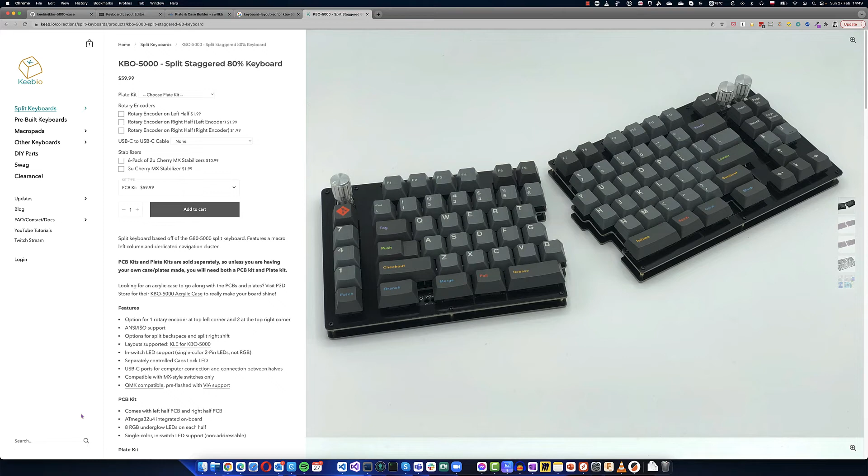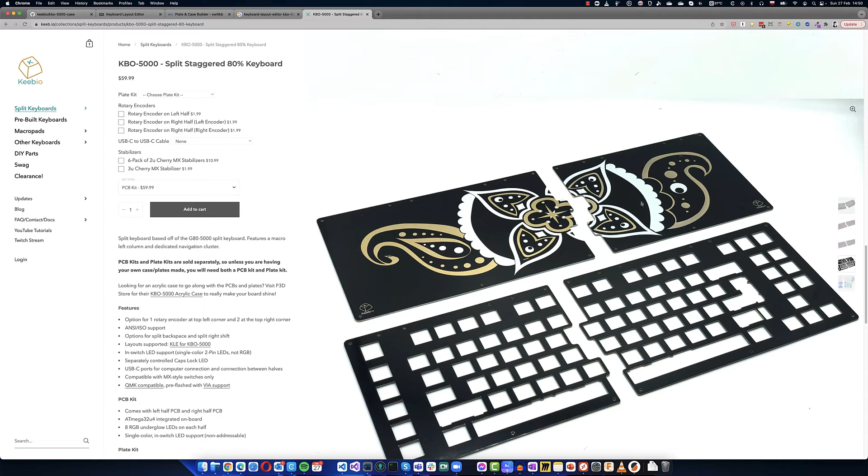Hi, it's me again, building my KBO 5000. So I have the board, I have plates and everything around it, the PCB that is Mill-Maxed and the plates and some additional stuff like switches. But for now I want to have the body, not only the plates but also the whole case that will be closed.

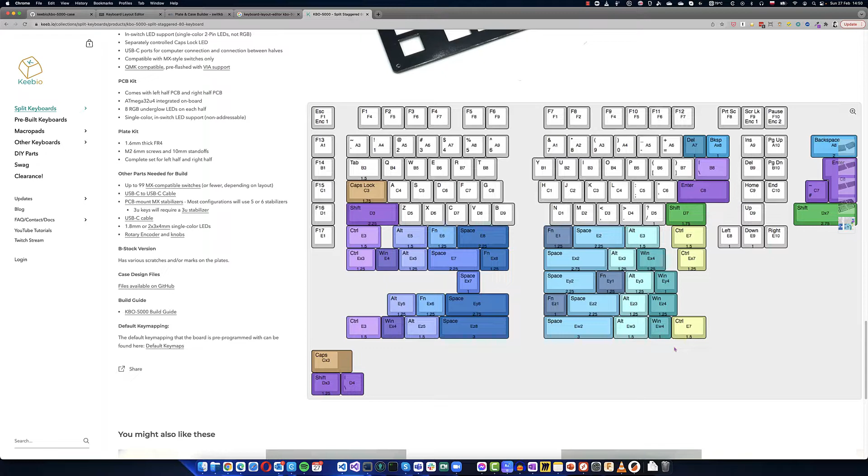What's the plan? This is a great place to start - the key map and every possible combination of the key. It was hard to find because here we only have the image.

Of course, I can build it from scratch in the tool, but it would be nice to have it out of the box. So first place to look is Keebio GitHub. Keebio has a lot of stuff there, and here are the cases, for example for KBO 5000 or firmware iris case. Also Quefrency, which I will also use.

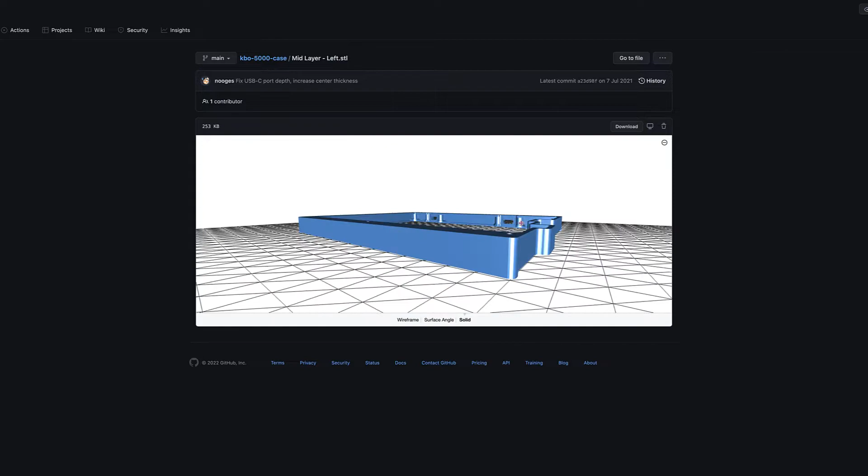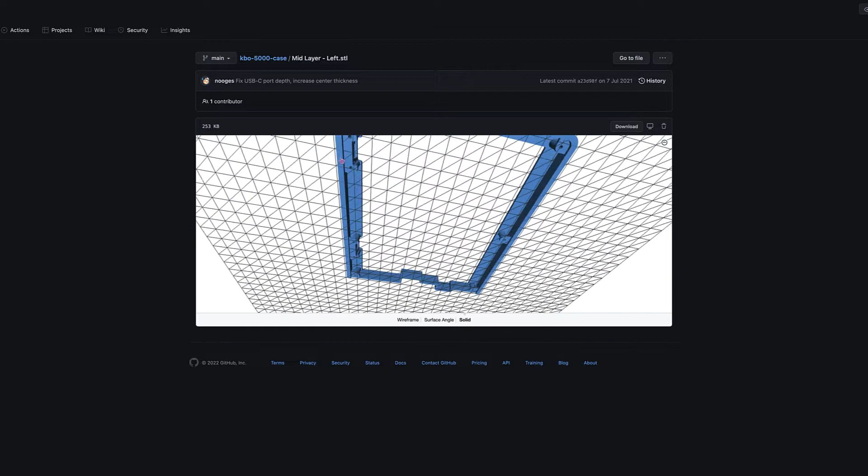But when we go to KBO 5000, there's only kind of middle case. It's nice that GitHub generates a preview of the file, and it's not bad, but at the front the case is a little bit wider than I would like, because I like when the underglow is nicely visible even with a transparent filament. It's now not so easy to get a clear view. It's easy if the case has only 2 or 3 layers, not even a millimeter.

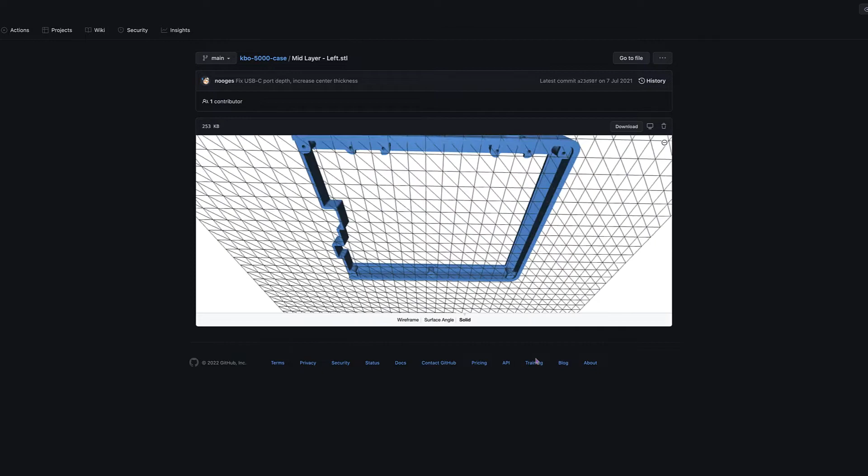So I wanted to have this. Okay, so the middle case is going away. And the second thing is here - the cutouts for USB-C. It's nice, but I still would like a little more place if the case won't fit so much, or if I want a little bounce on my keyboard.

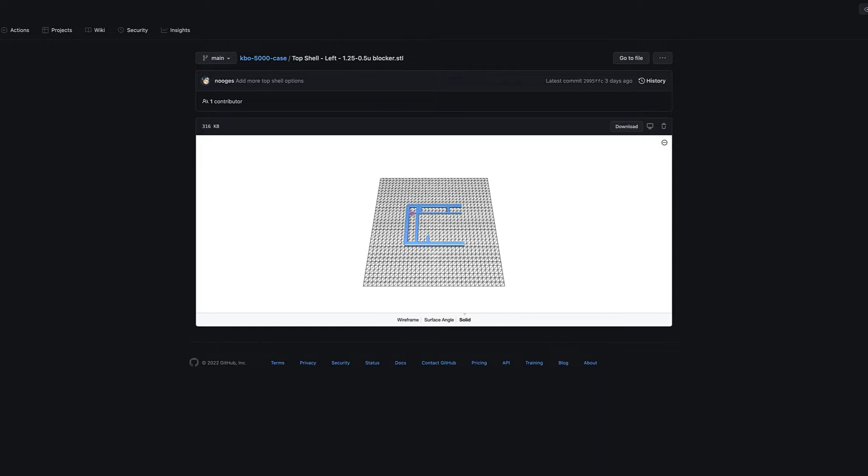So this is not the best start. Second thing, with blocker, let's go here. This is nice, we have blockers. I won't need them, and I will explain later. Here is the cutout for one switch, if we want with knob, and I have a knob, and it's a big knob. This is blocker, this is encoder. It's such a small cutout for the knob that it's not fitting my expectations.

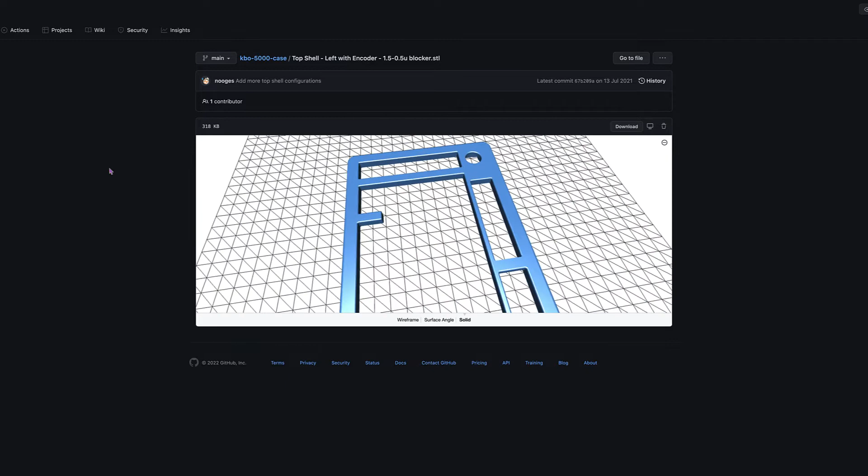So this is not good. We also have here DXF, but only for bottom plate and switch plate. This is really great, we will use it, but still no layout.

But there is Google, and Google says that in Trello is the link to the layout, and it's really great. It's KBO Trello where you can also see what they are working on right now, and here is also the layout.

Keyboard layout editor, great tool. We have all the combinations here, we have raw data. I will use it in a second.

I changed this layout a little bit. This is mine, and those are just to be deleted, and this is my layout: control, window, alt, big space, small space, alt, window, function, and control. This is important for me to have a function here. I would prefer it to be a little bit bigger, but you cannot have it all. Also, I can use those macro keys for additional functions, so I don't need function in here. It would be nice to have it, but I require Windows, so there was no good combination, unfortunately for me.

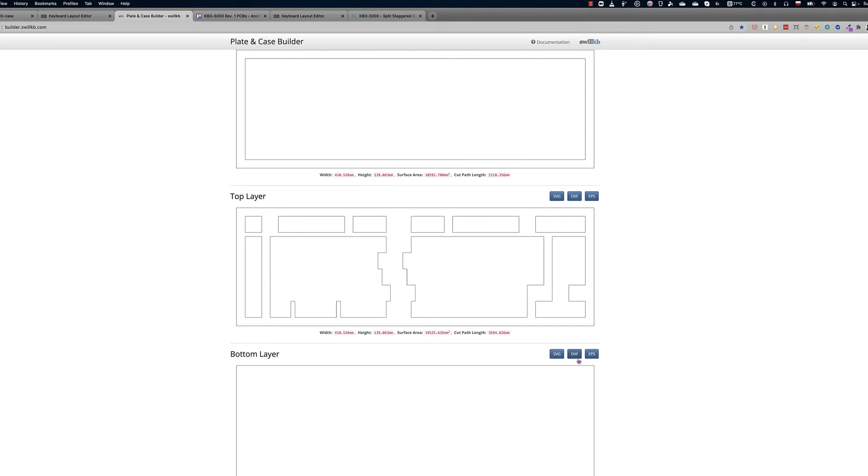So I can download it as SVG or DXF. What's the difference? DXF has the measurements inside, so it will be exactly the exact scale when I use it.

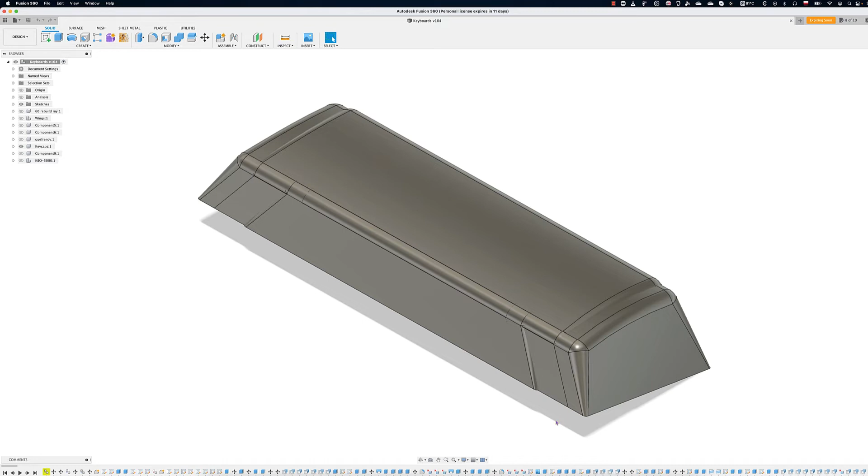And now we can jump to Fusion and create everything that we need. As you can see, I work on one file, but I have a lot of components, and this is my other project when I created the spacebars for this layout, because they are short spacebars, like 2.75U.

And we jump to the CAD. So this is the final result. We can also see it in render. It has a lot of clear spaces.

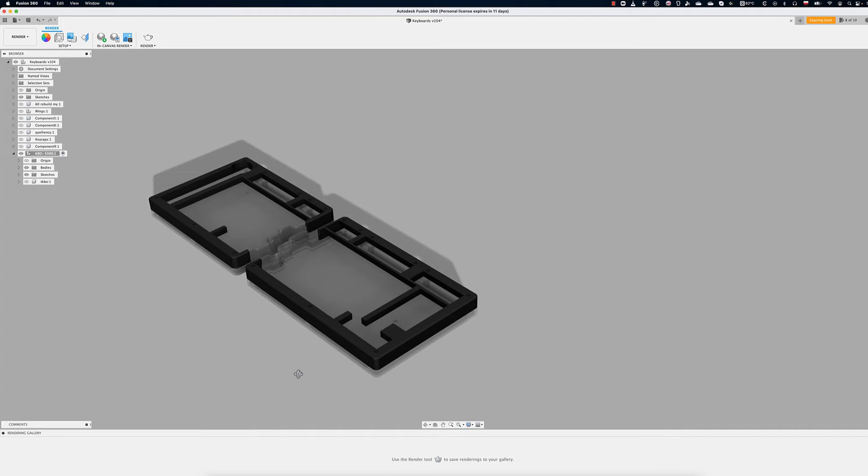It has bottom clear and the middle clear, and additionally there is a separation in the area where the boards could meet. They won't meet because I have bigger bumpers right here, but I never use my keyboard as one piece, so I don't care about it.

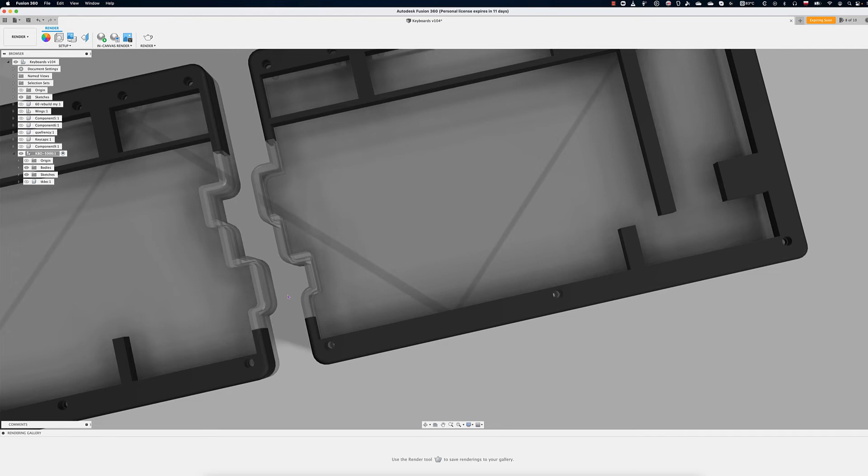And this clear case in here is because you cannot print everything like you want it.

Now I'm in the measure tool, and just look at this - it's 22 centimeters, but with an additional 4 millimeters that don't get to print on my printer, on my 22 centimeter printer.

I could go and do some adjustment in Marlin on my printer, but this is very complicated. I tried everything, and even with a properly generated G-code, the printer just cut the movement outside of 22 centimeters.

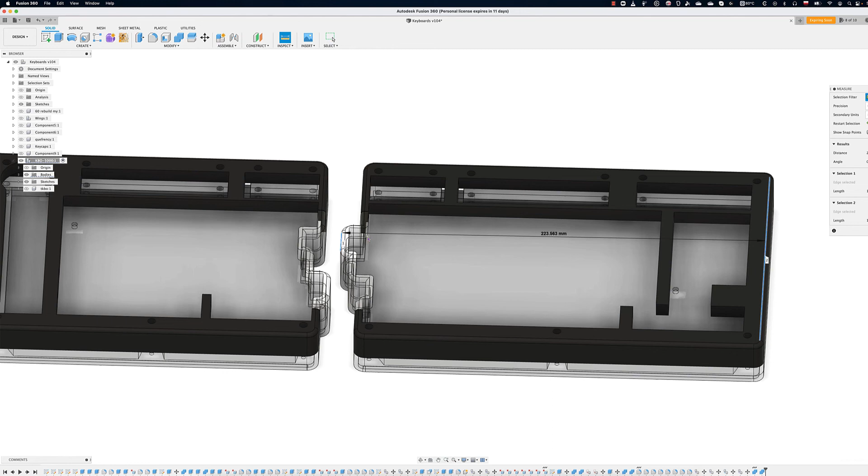I wanted to print the top just laying on the bed, so I wanted to have it less than 22. That's why this part - I will delete everything else - that's why this part is bigger, because I will print it standing.

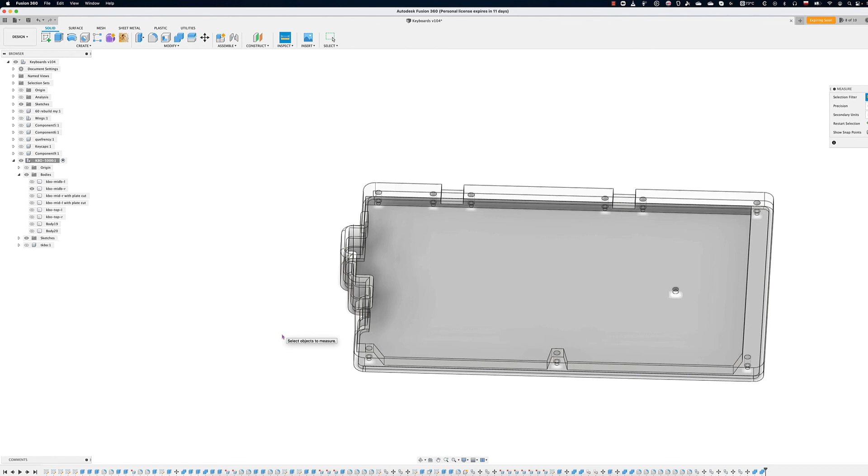It's not easy, but it's a solution, because a 22 centimeter bed can also print 25 centimeters high. I have an Ender 3, so it's normal parameters for this printer.